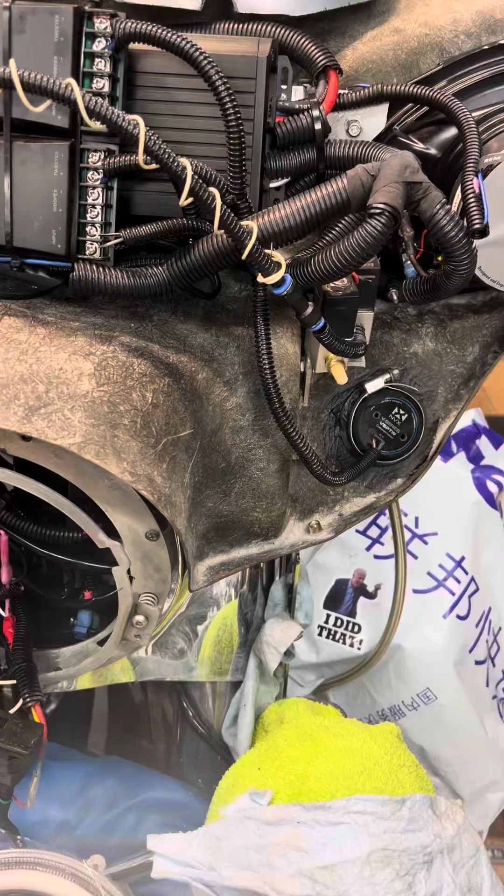This is for my air ride dump valves on my 2000 Harley Road King.

So this is kind of how I mounted them. Super simple, I basically used one of the mounting bolts for my fairing because it had just enough space on it. However, I had to hollow out the backside of this a little bit, I think that's how I did it. Or I used a smaller nut, a thinner nut, or cut one in half. Who knows, I can't remember. I'm always ass backwards, so this is kind of how I mounted it.

I'm probably muffling it now because I'm holding it. Ow, what the hell is that?

Alright, so I just ended up drilling two holes in the bottom, because on the bottom of these valves there's a mounting hole. These things come with their own brackets, but they weren't going to fit. I wasn't going to locate it under my seat or anything else because I got way too much crap going on back there.

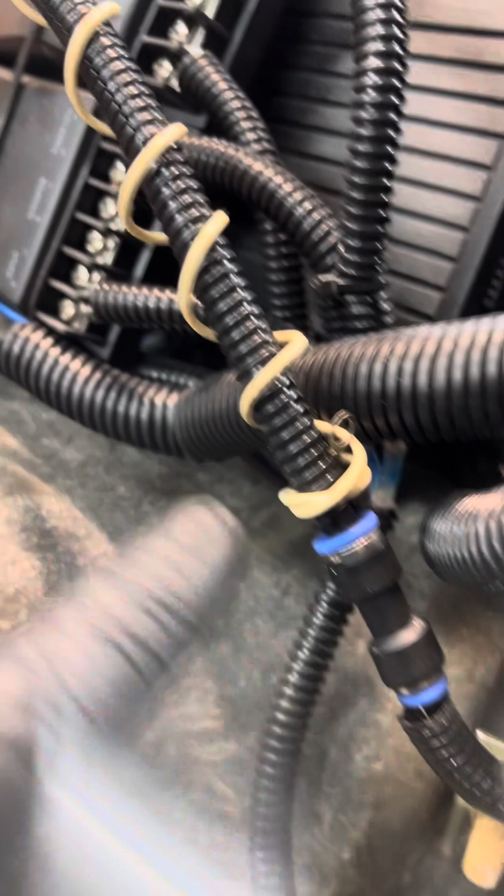So let's see, I had made a diagram for this, but that is how I mounted this. This is actually my antenna wire, which I'm never listening to the damn radio anyways.

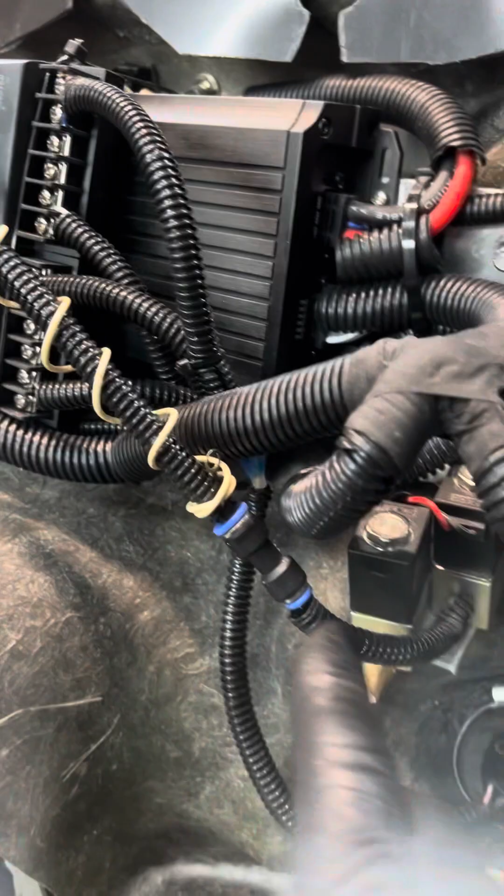It's pretty much just good for shit. But alright, so this is my main line coming in from the air tank, and then it goes out to the backside of the fill valve.

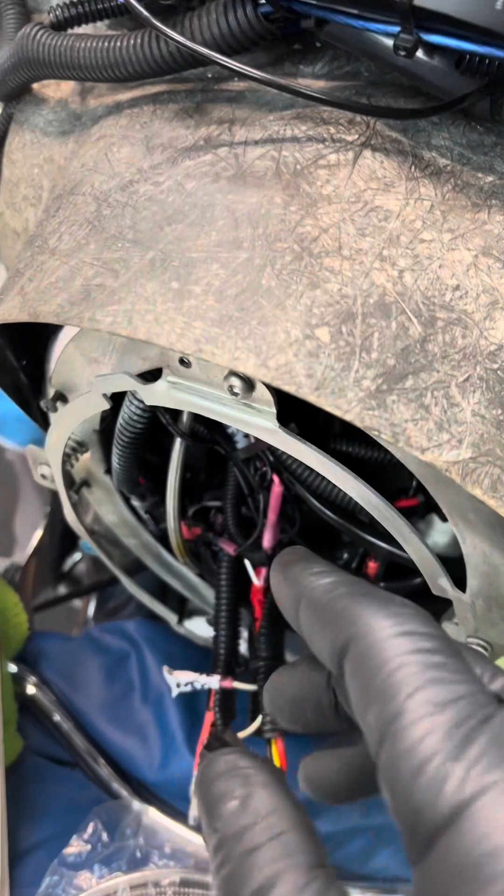It tees off and goes back into the dump valve, and then on the opposite side of that tee, it goes to your shocks. However, on mine, that line, what the hell, that's my headlight. Okay, that line is a 1/8 airline, really tiny, small little sucker, which doesn't really make sense to me, but that's what went into the shocks.

So I have this, this is a reducer. I went up to a 1/4 inch line, and then I ran an air gauge off of the T, and then the other part of the T goes back out to the shocks. So this just tells me that I'm not going to overextend my shocks, I'm not going to have too much pressure in them, but I can actually adjust my ride height to whatever I want, and then I can hopefully remember what the hell that is and get close.

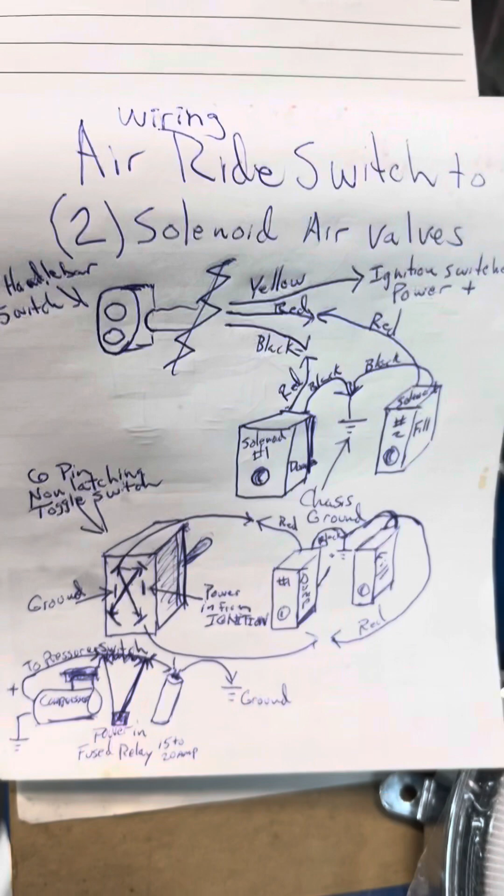And then let's see, oh no that's not the one, okay there we go. So that is how I plumbed it in.

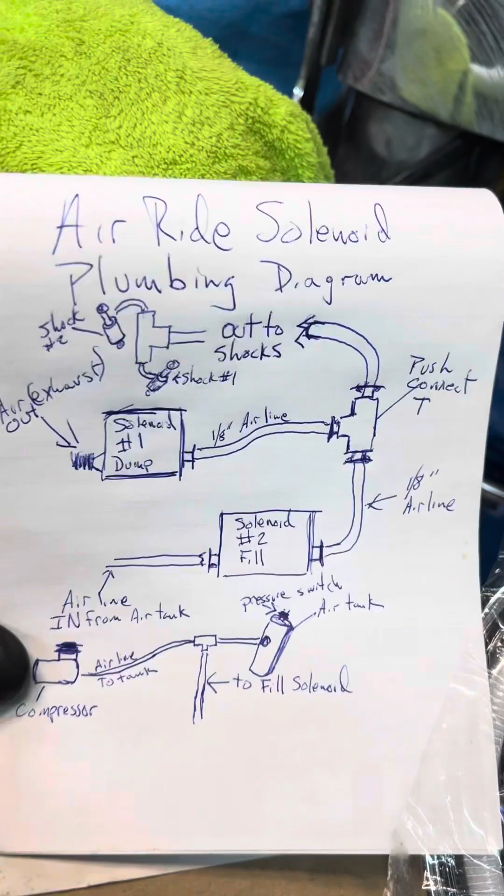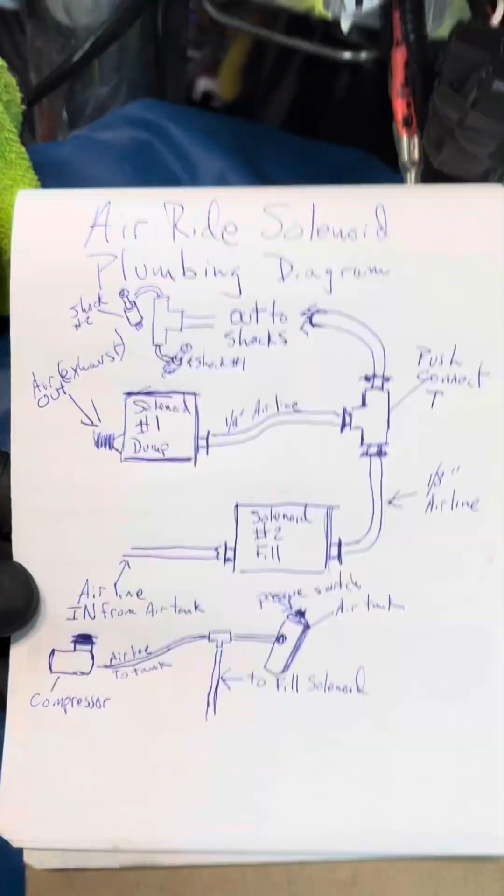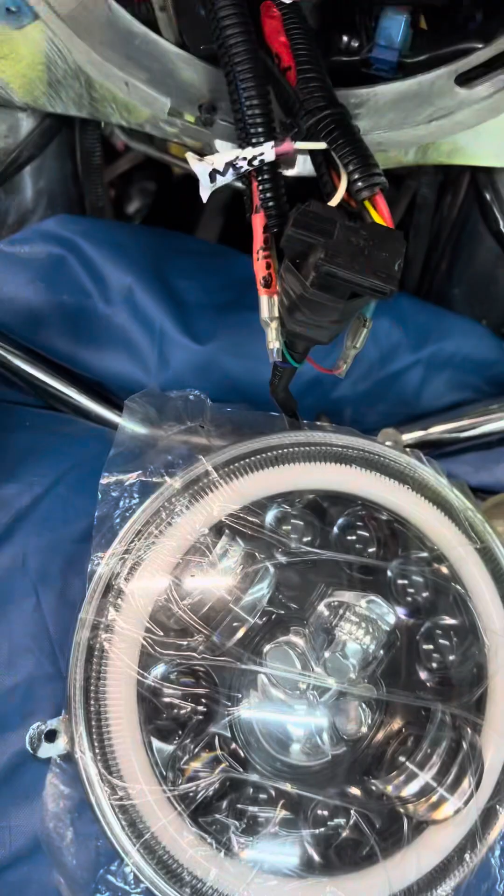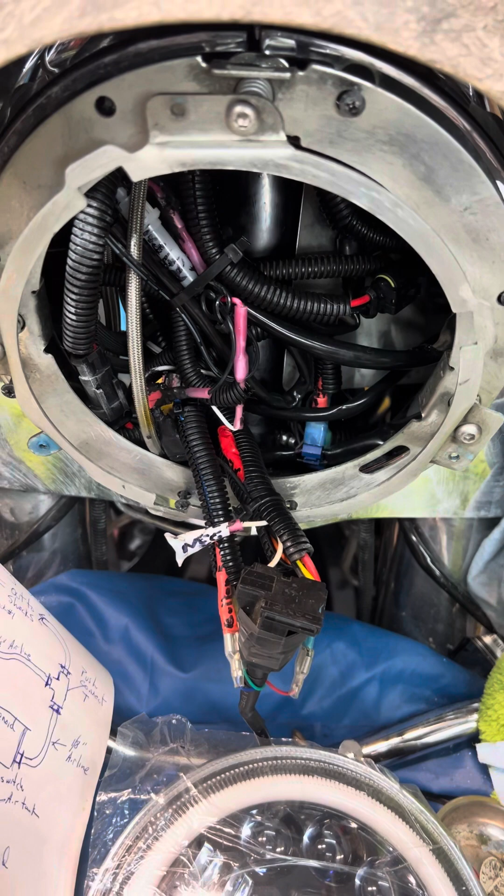I think what I'm going to do now is I'm going to button all this up, and I'm going to show you kind of how to do a couple different things with the headlight, how to get your gap closed so that you can get your whole headlight holder in. I know I put out a video already on how to put this in, but kind of screwed myself on one part, but it'll work out. I'll show you on another video.

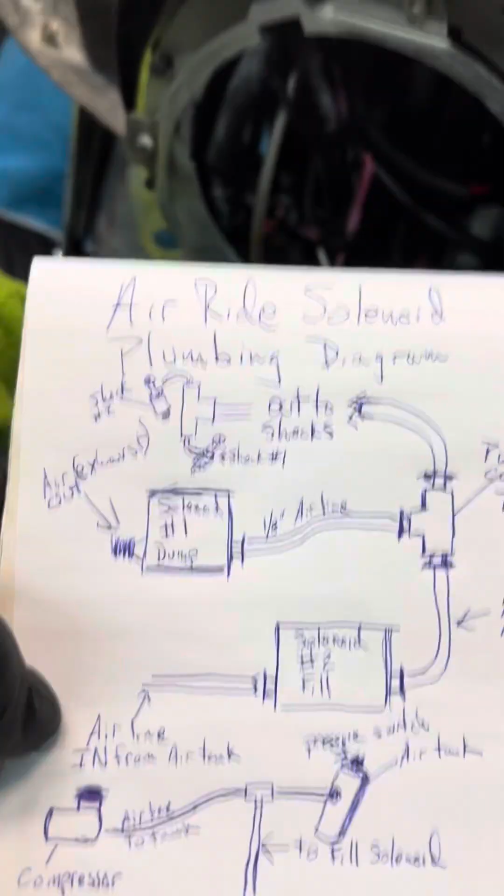So God, I'm an idiot. One more time, that's how I plumbed it in.

Hopefully it's somewhat simple. The wiring, on the other hand, is a little different.

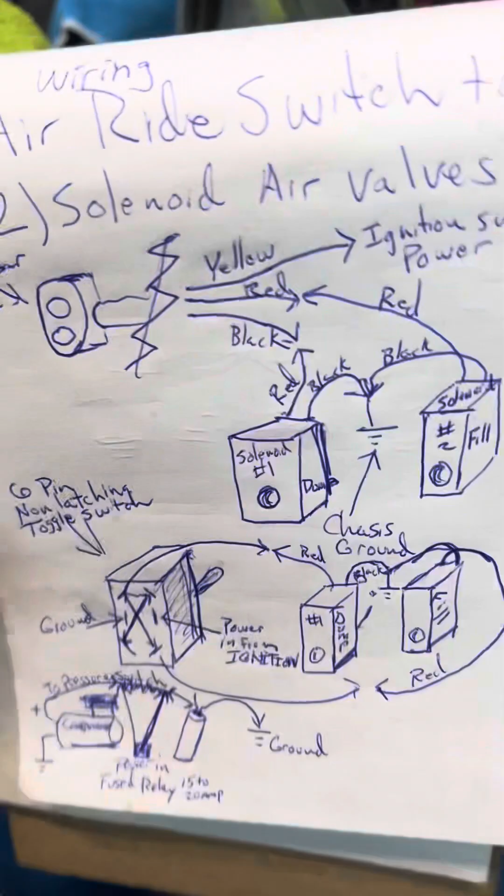I'm gonna hold this on a weird angle so it really shows well. No, I'm just kidding.

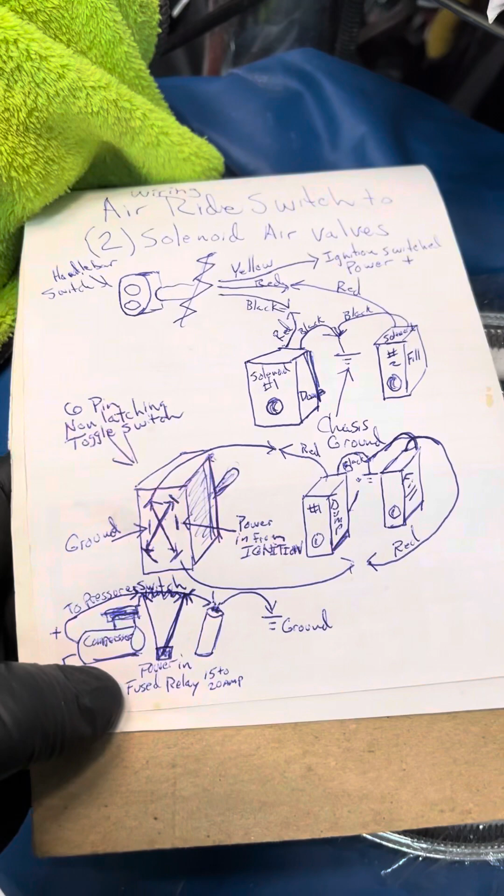So if you got that, it's not so hard. I did kind of screw up on my diagram a little bit and I scribbled that out, but this line from your battery or from your compressor needs to go to a relay.

I would highly recommend a relay. They have fused relays, which have the fuse right on them. However, I like to have mine enclosed, waterproofed, blah blah blah. So it'll go into that relay.

I have different videos on how to wire a relay, and back out to your pressure switch on your tank, because when that is key switched on, it'll energize to where if your pressure isn't full, it's going to activate the ground, which then activates the system to kick on your compressor.

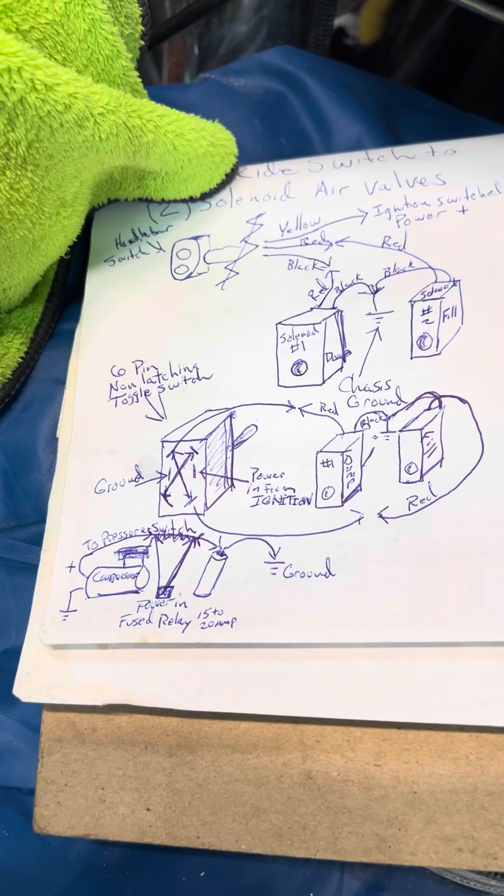And then depending on what size pressure switch you have, it'll kick off at a certain amount of pressure and turn on at a certain amount of pressure. But there's all different kinds.

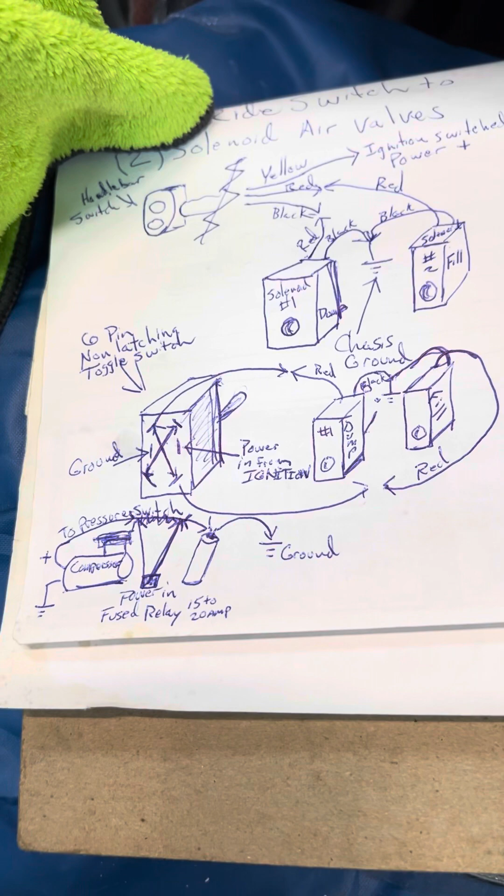I actually have this one set at about 280 pounds, so it's like an ejection seat if anybody hits the up button. No, just kidding. No, I actually have mine at about 180, I do believe, for the tank that I made, which I know is capable of more. However, I don't have the luck to chance that.